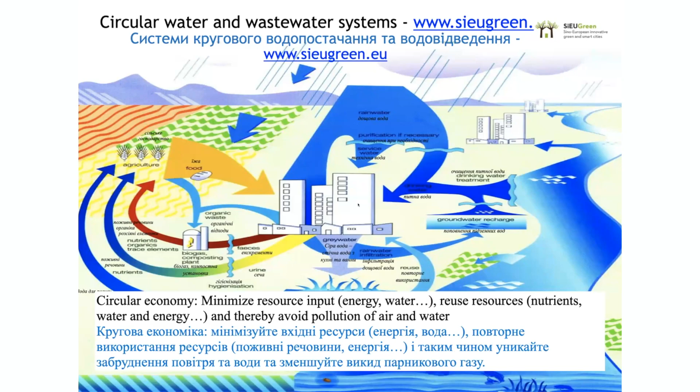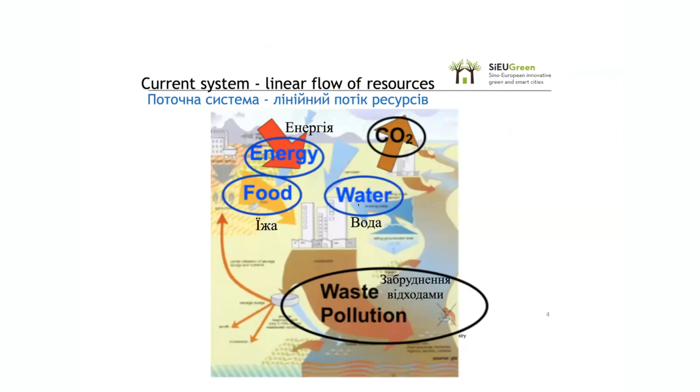And the Commission in Brussels have recognized this. They have already put out requirements to remove organic matter, to remove phosphorus. Now, the new wastewater directive will probably have stricter requirements. They want us to remove also nitrogen. They want us to remove organic micropollutants. That's important. And they hopefully also will initiate recycling, probably that we should recycle 40 or 60% of the phosphorus. But it's still a lot of focus on removal.

And removal of nitrogen, that is to turn the nitrogen back to nitrogen gas, which initially sounds good, but it costs a lot of energy. When we denitrify in our current treatment plants, we also emit, say, between 1 and 5% of nitrous oxide, which is almost 300 times more potent as a climate gas as CO2.

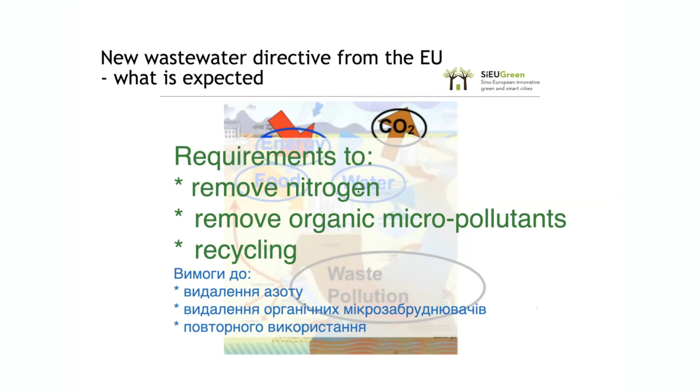We have other issues that also makes us focus more on recycling. The war in Ukraine made the fertilizer prices peak. It's going a little bit down now, but the farmers are struggling. Farmers in Norway, their economy is going down, down, down. Their input factors in terms of fertilizers, pesticides, fuel is increasing. The farmers are in despair. And also availability is an issue. China is reducing their export of fertilizer, for instance.

That's an important micronutrient, and sulfur is 60 years. Then there's natural gas. What does natural gas have to do with it? Nitrogen fertilizer uses a lot of natural gas when it's produced, so we can expect those prices to still increase. We have about 50 years left, according to Petter Jenssen, a professor from the Swedish Agricultural University.

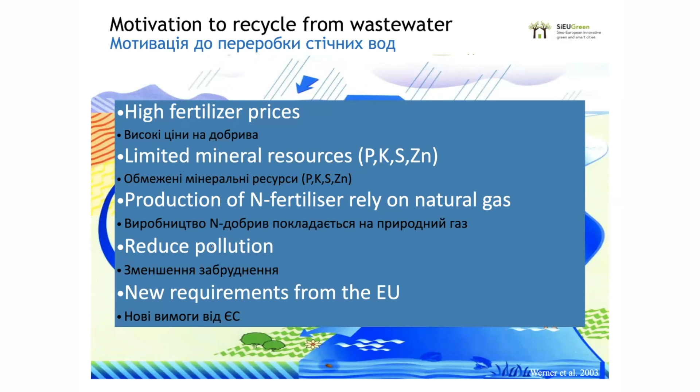And we have requirements from the EU that might also encourage recycling. What are the organic sources we can recycle? It was interesting when I read the press release from the large Norwegian fertilizer manufacturer Yara in 2019. They estimated the fertilizer value of organic resources in Europe at 2 billion euros. And what are these resources?

It's wastewater. Wastewater consists of gray water, which is all the water used for washing, showers, sinks, and so on. In addition, you have the excreta, urine and feces. This is what we will concentrate on today, that's what we have time for.

We also have organic household waste, different kinds of farm waste, and waste from the food processing industry. All this can have resources that can be turned into both bioenergy and give nutrients for agriculture. And we in Norway have a lot of waste from aquaculture.

Actually, in Norway, the discharge of organic matter from aquaculture by far exceeds the discharge from the country's population. But the government allows this to continue because we earn so much money from our aquaculture.

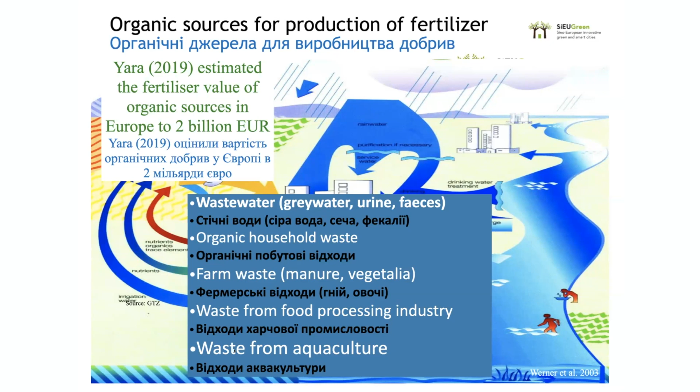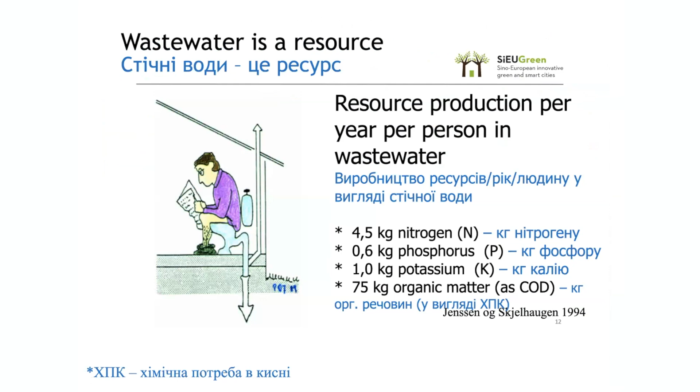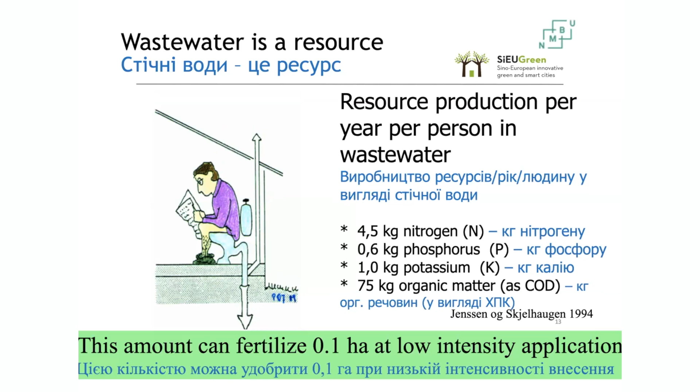Wastewater is a resource. One person emits about 4.5 kilogram nitrogen, 0.6 kilogram phosphorus, and a kilo of potassium per year—a pretty good fertilizer combination. Also, 75 kilograms of organic matter that can be turned into bioenergy and compost. In conventional agriculture terms, this amount can fertilize about 0.1 hectare at a low intensity application.

On a world scale, if we could recycle all our excreta, we could in Western Europe and North America supply about 15 to 20% of the current mineral fertilizer use. If you go to Eurasia, and Ukraine is part of that, it's around 40%. And in sub-Saharan Africa, we could substitute about all the current fertilizer use.

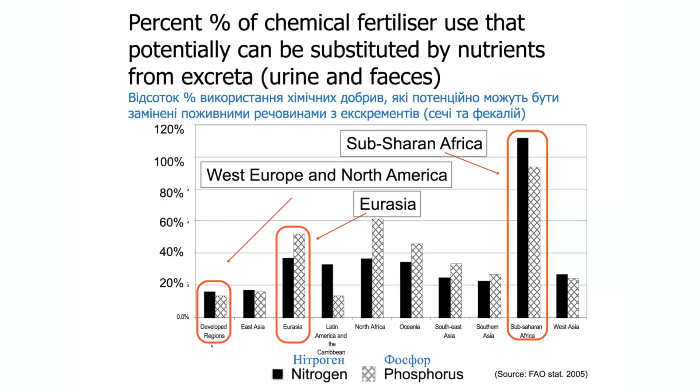This, of course, reflects that we use much more mineral fertilizer in West Europe than in sub-Saharan Africa. But conversion to regenerative agriculture will reduce the need for mineral-based fertilizers, maybe in some cases totally eliminate it. And maybe these organic fertilizers can supply much more than 15-20%, maybe everything.

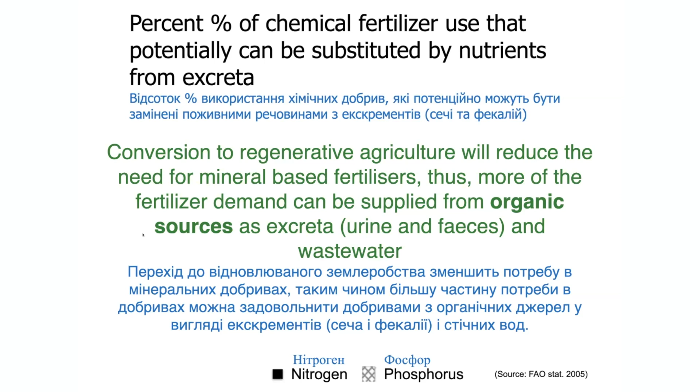We'll see. Another interesting thing is that in our excreta, urine and feces, we find 90% of the nitrogen, also around 90% of the phosphorus, and 80% of the potassium, plus more than 50% of the organic matter, and the majority of the pathogenic organisms.

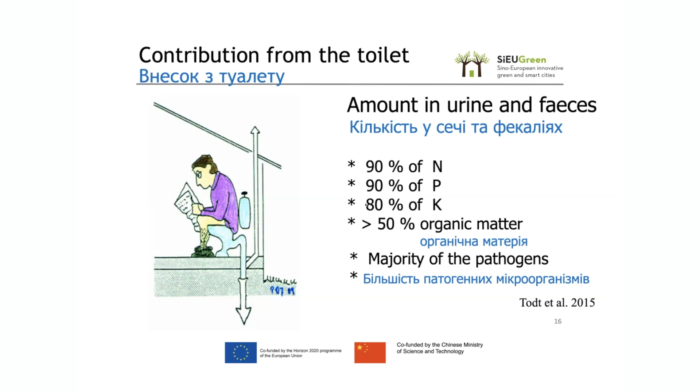If we look a little more into detail on the wastewater fractions, we can see that urine contains by far the most nutrients. Urine is the blue in this diagram. The brown or maroon is the fecal matter, which contains much less. And the gray water, all the water except what comes through the toilet, contains maybe around 10% of the nutrients—very minor compared to the excreta.

If we go to the column on the very right, we see that gray water constitutes most of the volume. Does any of you know how much we excrete per day in terms of urine and feces? Have any of you measured this? Probably not.

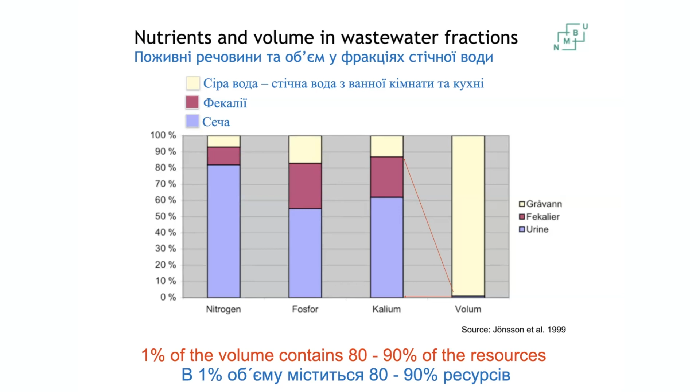But it's 1.5 liters on average, more if you drink a lot of beer. In Norway, the average water use in households is 150 liters per person, meaning 1% of the wastewater volume contains 80-90% of the resources. We need all this water to transport the waste through our piping systems, to keep the speed up and the pipes cleaned. So if we had designed these systems today, I guess we would have done it differently.

If we're going to make organic fertilizers from, for instance, wastewater, we have some requirements, and the EU has put out some requirements. You can see some references at the bottom of the page. We have to be concerned about the content of pathogens - that's not very difficult to get rid of with current practices we know. Heavy metals, that's also not a problem if we can collect clean excreta.

But of course, in a large centralized system where we have input from industries, from roads and so on, it's more of a concern than in a small decentralized system where only households are collected. Also, the content of organic micropollutants is more of a concern in large systems than in small systems where we have much better source control.

Organic micropollutants are of concern today and will probably be a requirement to remove. That's pharmaceuticals, personal care products, flame retardants, as you've heard about - PFAS, PFOS, and so on. This stuff we need to get out of the cycling, and we'll look into how.

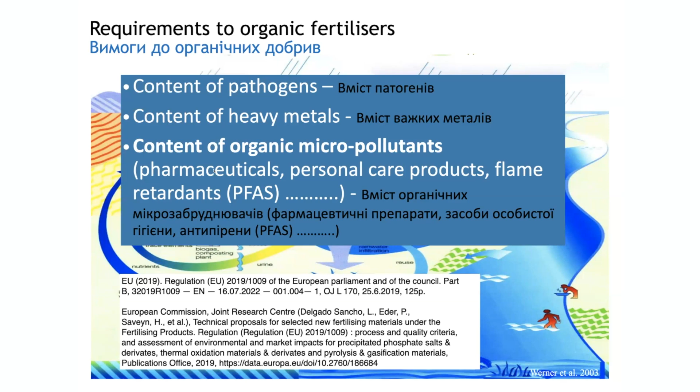First we'll start by looking into large centralized systems. What can we do with our current systems? Because they will exist for decades. Then we'll go to the decentralized systems with source separation and look at systems from household and farm scale to city scale.

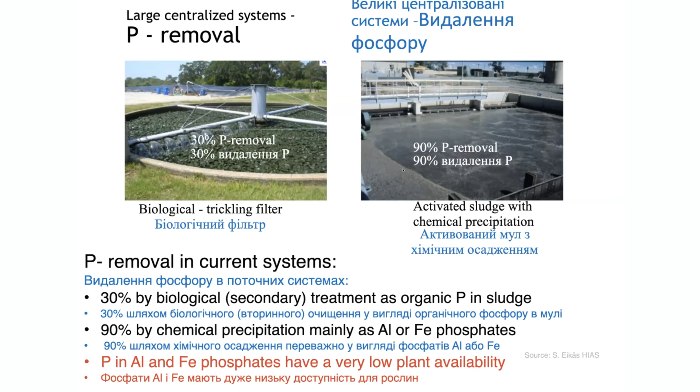As I said, we're concerned about removal today. It's very common to have biological treatment as a trickling filter, and you remove about 30% of the phosphorus in the sludge. If we go to a more advanced system, activated sludge with chemical precipitation, we can remove 90% of the phosphorus - but that's just removal. The problem with precipitating phosphorus with aluminum and iron coagulants is that the aluminum and iron phosphates have a very low plant availability.

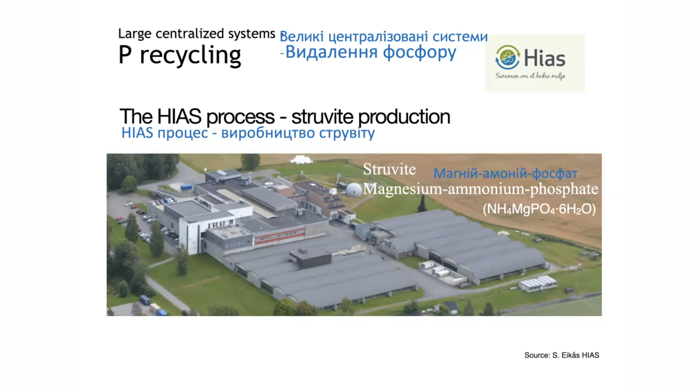So let's jump to Norway and HIAS's treatment system outside Hamar in Norway - one of the larger treatment plants in Norway, which has developed a new method for removing phosphorus. They precipitate phosphorus as struvite, which is magnesium ammonium phosphate. The HIAS process removes 90% of the phosphorus, meeting their current requirement of 90%. But they remove 50% as struvite and 50% as organic phosphorus pellets. This is new, and struvite also contains some nitrogen.

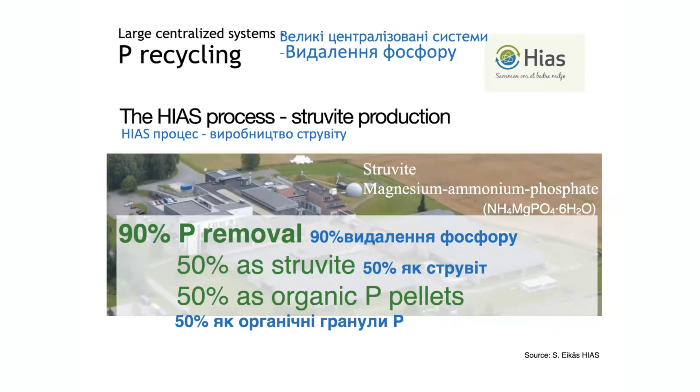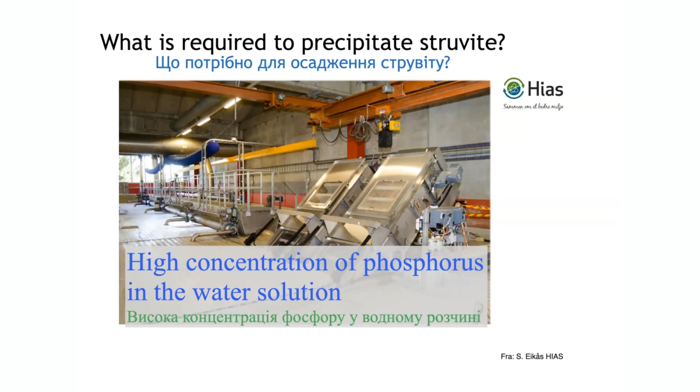Well, you need to concentrate the phosphorus. At HIAS, they use a biological process to let the bacteria super-consume phosphorus. They concentrate the phosphorus in the solution, and then they can precipitate struvite. This is a groundbreaking process - probably the world's most compact biological treatment technology. They have avoided using chemicals, reduced the footprint of the system, and not increased the energy consumption of the system.

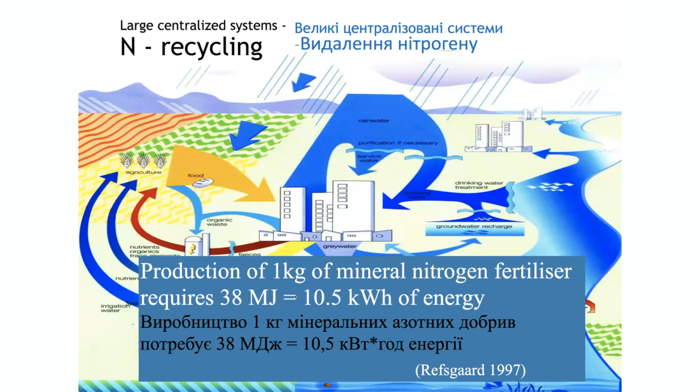Then let's move to nitrogen. I said nitrogen production requires a lot of energy - 38 megajoules to produce 1 kilogram. That's as much as in 1 liter of diesel oil. If we can return nitrogen to agriculture at a lower energy cost, we probably have a more sustainable system. So how can we return nitrogen?

In large systems, we already have ammonia stripping, but we need other things. Stripping can only take out 15%. Membranes, ion exchange - we have other systems. Algae-based systems are interesting, I'll come back to that. But a good system for recycling nitrogen in large-scale treatment plants has not yet been developed.

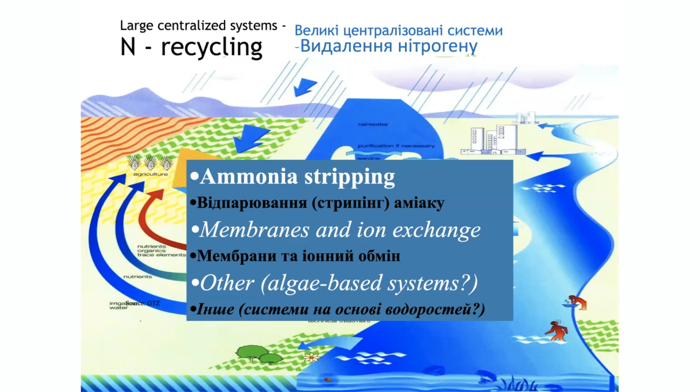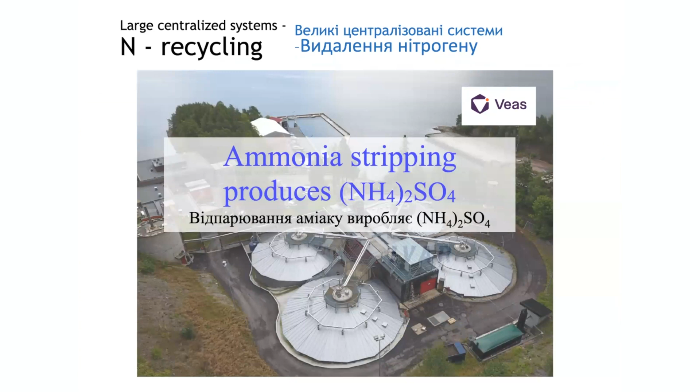Ammonia stripping, as they have in Norway's largest treatment plant, as you see a picture of here, produces ammonium sulfate, which they sell to Yara when they make fertilizer from it. But ammonia stripping also requires high concentration of ammonia, and this we only find in the reject water - the water that comes from sludge treatment. That contains only about 15% of the nitrogen input to the treatment plant. So we can only take out 15%; the rest is much harder to recycle.

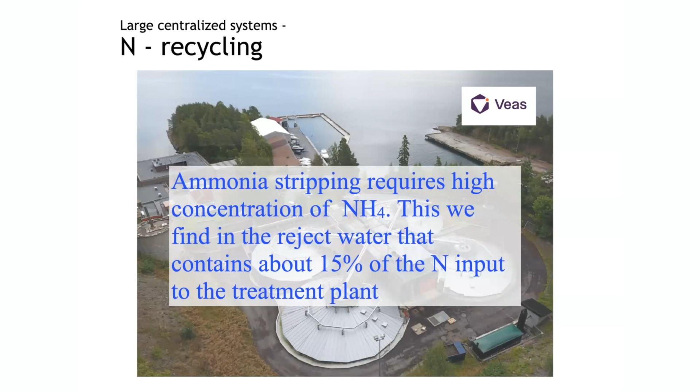Before I leave the large systems, I want to look a little at energy and biochar production. Many systems, as you see in this picture, have a biogas system. They produce biogas - that's not new. But microwave pyrolysis, which some of my colleagues are working on, is an interesting process to introduce at treatment plants, and I think it should be introduced in future plants. With microwave pyrolysis, you can take sludge that cannot be used for other purposes and turn it into biochar and energy, producing quite a bit of energy with this process.

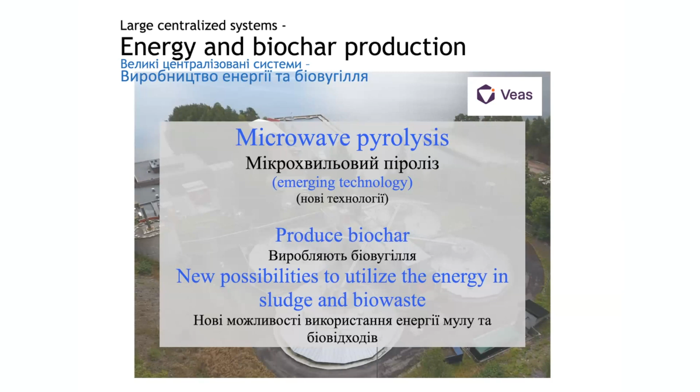Biochar is also interesting. Julia worked on biochar, but this is not Julia's work I'm showing - it was another student who used coffee grounds to make biochar. This coffee ground biochar resembled activated carbon very much, and activated carbon we use to sorb organic micropollutants.

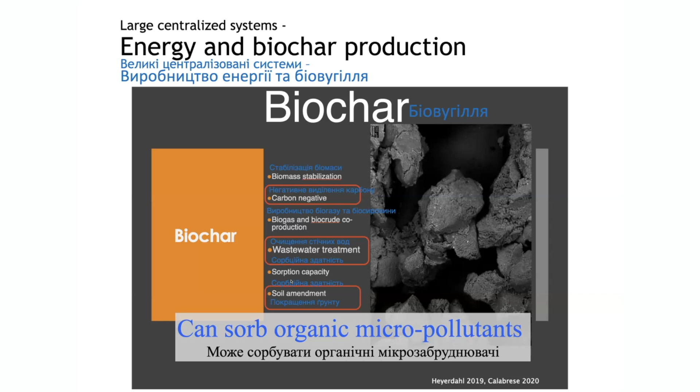They have used biochar successfully in Sweden. We want to use it also to try to remove organic micropollutants in our systems. Biochar has other positive effects too - it's carbon negative and a good soil amendment, but we have to make sure it has the right quality, and we should not cut down new forest just to make biochar, because then it may not be carbon negative. So do it with care.

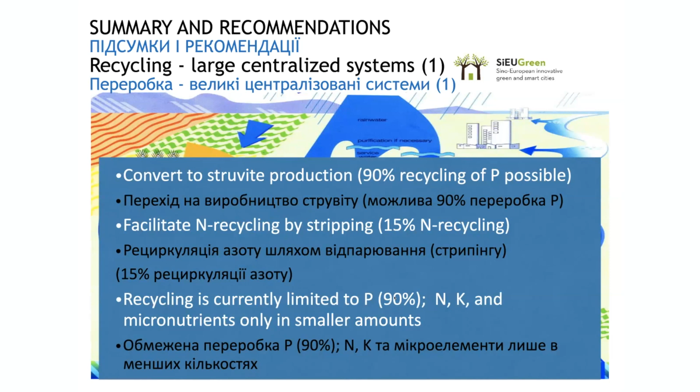So we can summarize for the large systems: we should convert to struvite production and facilitate nitrogen recycling. Recycling is currently limited to phosphorus, at 90%. If we produce struvite, it can be available for agricultural production. But the other resources and micronutrients, we can only recycle in very small amounts.

As I said, in larger systems source control is more difficult. We need to pay more attention to heavy metals and micropollutants. I think large systems should investigate possibilities to produce soil amendment products from sludge, but it's a challenging task. In this task they could consider including microwave pyrolysis to get rid of products that are not easy to recycle, that contain organic micropollutants, because microwave pyrolysis will combust most of these.

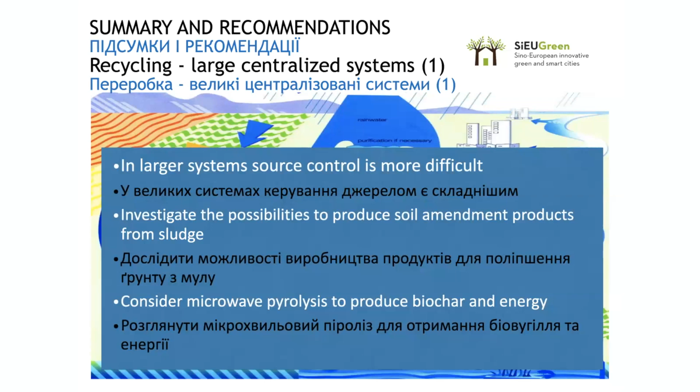So we have now looked at large-scale systems, and we'll move to decentralized systems with source separation, which you can most easily do on a household scale. You can do it on a farm scale, but also on a city scale. I won't go too much into that, but it's a very interesting approach if we really want to recycle from the large hubs of resources that cities represent.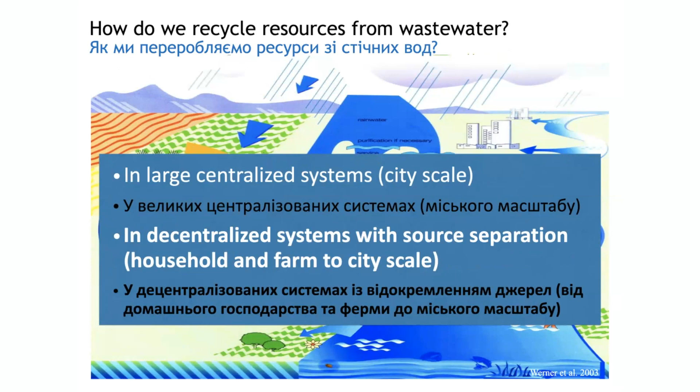I want to remind you, most of the resources are in the excreta, in the urine and the feces. So if we had designed a wastewater treatment or handling system today, I think we would have gone for source separation. We wouldn't have invented the water toilet and all these pipes that are so extremely costly - at least in Norway - to maintain, run and operate.

We would have taken the toilet waste and run it into what we call here on the diagram a nutrient and energy loop, where we produce nutrients, energy, soil amendment, and eventually food that we return to society. We could also recycle the gray water - I won't go into that in this talk, but in the SIEUGreen project we recycle gray water for irrigation, and also made drinking water from gray water.

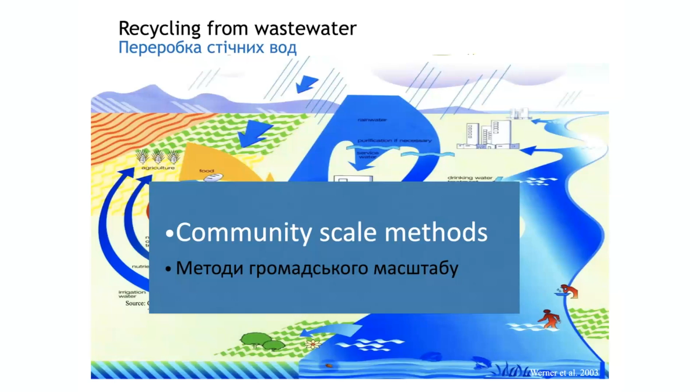I'll start with what I call community scale methods. This is a demonstration system we have at our campus in Ås, Norway. We are using vacuum toilets for 24 flats in our student housing. The toilet waste or excreta is directly funneled or pumped to an anaerobic digestion system producing biogas.

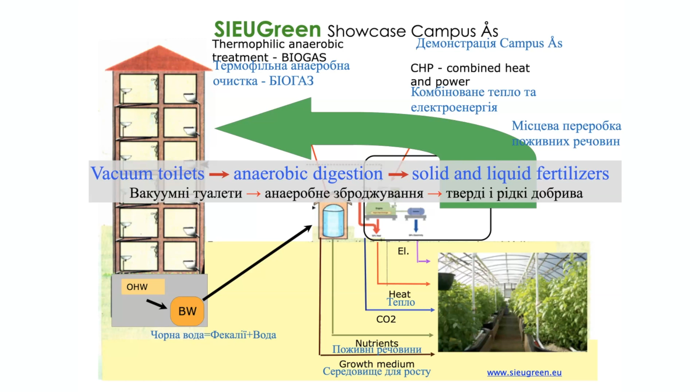We can also add organic household waste here, and what comes out is called digestate. We have solid and liquid fractions that we turn into fertilizer.

When we burn off the biogas, we co-generate electricity and heat that is transported to a nearby greenhouse. We also produce CO2 when burning the biogas, and this is funneled to the greenhouse to increase CO2 content. This is a very special greenhouse - extremely well insulated, with a special vent system so we can keep the CO2 in there and increase plant growth. Maximum growth occurs at about 1200 ppm CO2 in the air, compared to around 400 in the air we breathe.

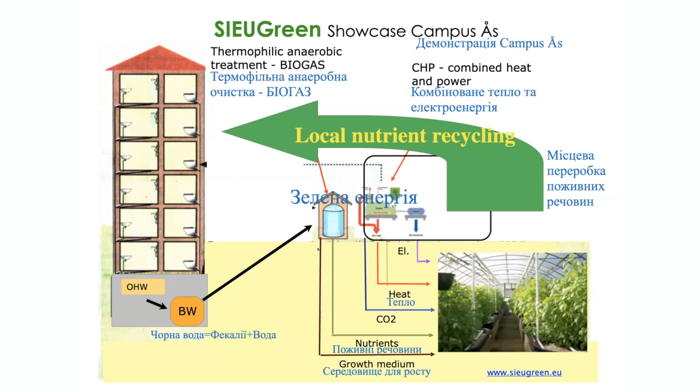From the liquid digestate we produce liquid and solid fertilizer products. From the solid digestate, what we filter off in this process, we compost that and produce compost or growth media. Struvite is difficult to produce in a large continuous process like at HIAS, but there are commercial processes now, like the Ostara process used at HIAS - that's an American process. But if you go down in scale, you can easily precipitate struvite in batch.

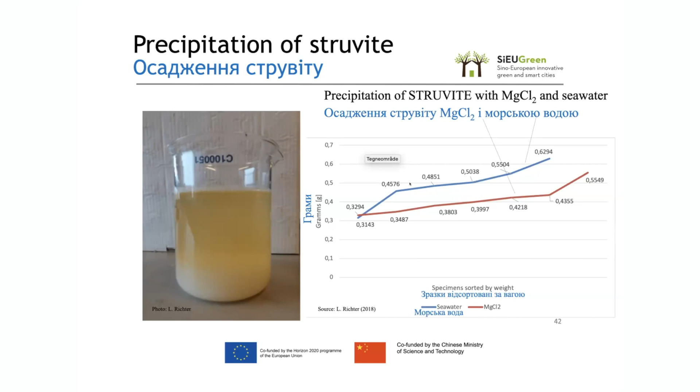You see in the picture here, we have struvite in the bottom of this beaker. We have tried to precipitate struvite with both magnesium chloride, electrocoagulation, and seawater. And you see the blue curve here - it gives more struvite with seawater than with magnesium chloride. And magnesium chloride is expensive, so if you're near the sea, seawater could be an alternative.

Algae can be used as green manure, fodder, and it can produce fat. There are many, many possibilities. So I think using algae also in large scale might be a very promising option in the future that we should look more into.

But we have talked about that we need to make high quality fertilizers. It cannot contain bacteria too much. It shouldn't contain organic micropollutants. So here, where we have excreta from student housings, we know that we are below the requirements for heavy metals.

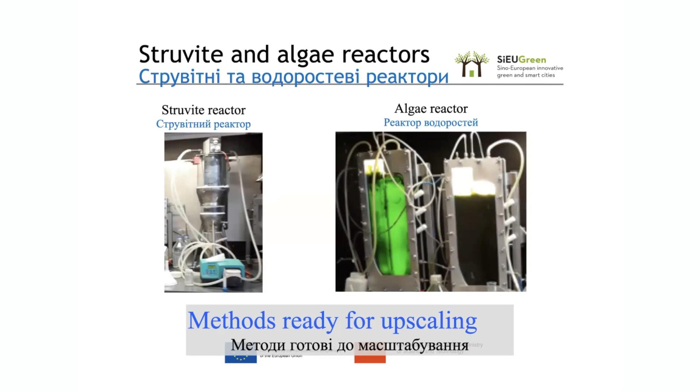So from biogas digestate, we produce liquid fertilizer, and the liquid fertilizer contains all the nutrients, macro and micro. Struvite contains mainly phosphorus, and only around 5% is nitrogen in struvite. Algae biomass also absorbs all the nutrients, macro and micro. And then we make compost.

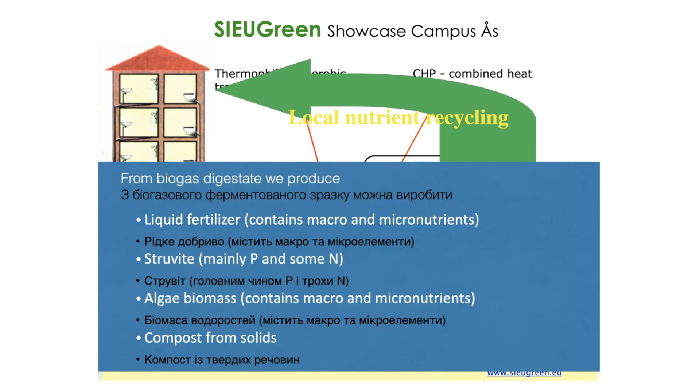So the system you see here is a decentralized, complete recycling system that can be used for one or more apartment buildings, a section of a city, a village, or a group of houses. It can also be used to sewer the whole city if you convert it to low flush toilets like vacuum toilets. But it's a technically fairly advanced system, and maybe it's expensive, but it's possible to do this decentralized with a system like this, and it's not more expensive than the conventional systems.

We have made calculations showing that for a large development outside Oslo, 10,000 people, it's actually 50% cheaper in terms of investment, and also substantially cheaper in terms of operation and maintenance. One of the reasons is that this can be built out in stages - you don't need to have the whole system in place before you can attach the first apartment. I won't go more into that, but it's extremely interesting to look at decentralized source separating systems also in cities.

Then farm scale methods. If you're a farmer and you need fertilizer, why not build a sludge drying reed bed? That's in any textbook of wastewater treatment. But instead of sludge, you can apply black water that you collect from your neighbors or from your own farm. You can also handle some of your manure in this system if you size it for it.

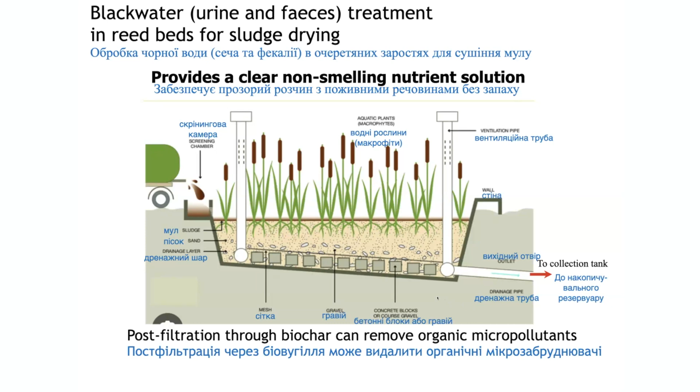And then you will have a clear, non-smelling solution coming out at the bottom of the system. And this you can apply as a liquid fertilizer in your field if that is appropriate. You can also have a post-filtration stage in a small, simple filter to remove the organic micropollutants if you want to. And how should you apply this? Well, we saw some machines yesterday.

I wanted to show this machine that a couple of colleagues developed in the 90s. It was developed to inject liquid fertilizer into the soil. And the liquid fertilizers we used were urine, processed black water, and also liquid composted manure. The reason why we wanted to inject it like this is that if we surface apply it.

You can lose 70 to 89% of the ammonia because these liquids contain nitrogen mostly in the form of ammonia. There's also a smell connected with that.

But in this system, we shoot both seeds and the liquid, in this case a fertilizing liquid, into the ground. We don't have anything that penetrates the ground. It's a ski that slides on top of the field and shoots pulses down with the liquid and the seeds. When we did this, we had yields comparable to the yields with mineral fertilizer, and this was with much less power to pull. It was saving both operation time and power on the tractor, and we could do it easily in no-till systems.

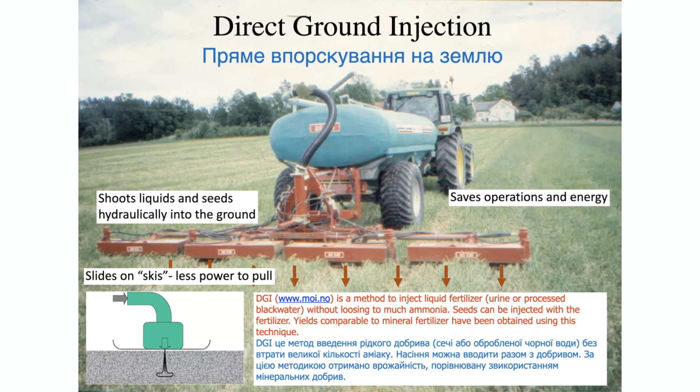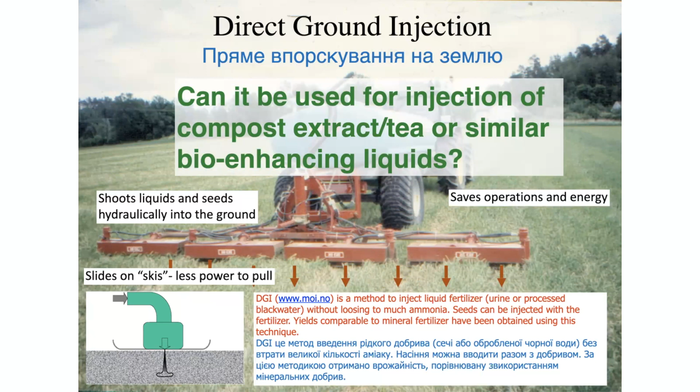So could this machine be used for injection of compost extract, compost tea, or similar bioenhancing liquids? I have one concern because I work with vacuum toilets and how the vacuum affected microorganisms like bacteria. With normal vacuum toilets, they did not die off in large amounts. Here you have hydraulic pressure - how does that affect it? We need to test that, but they're pretty hardy guys. Most of them should survive, but maybe the larger ones, if they were there, would be more affected. This needs to be seen, but anyhow, it's an interesting machine.

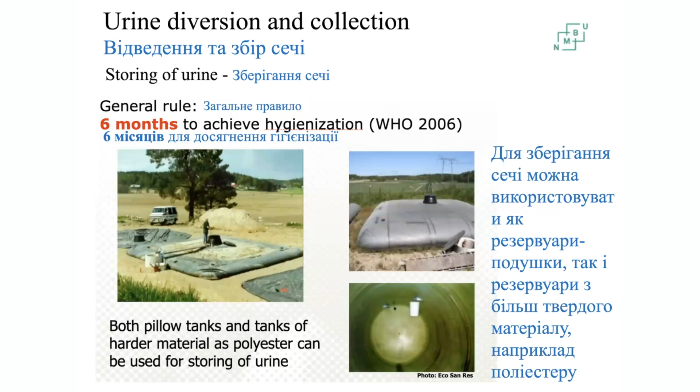And it can also be used to apply urine. These pictures are from Sweden. Urine is the simplest way to get fertilizer if you are a farmer. Collect urine, store it for 6 months - that's what the WHO, the World Health Organization, requires. And it can be stored in pillow tanks on top of the ground. That's cheap, but you need urine diverting toilets.

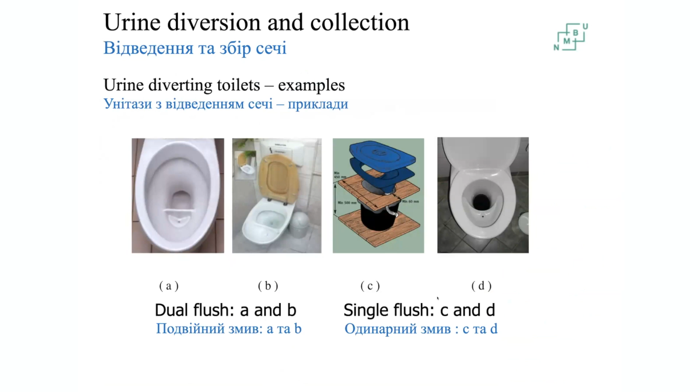So then we go to the household scale, and we move to Ukraine, Bogdan. You sent me these nice pictures. I'm really looking forward to coming down and seeing your biopots, because in the biopot you can treat your wastewater, and at the bottom you can have a clear, non-smelling nutrient solution. This is how it happens.

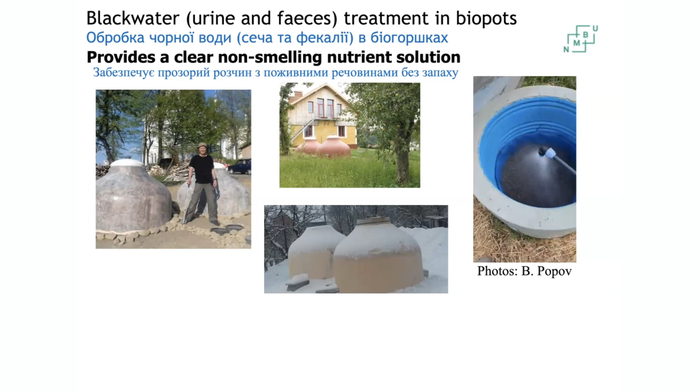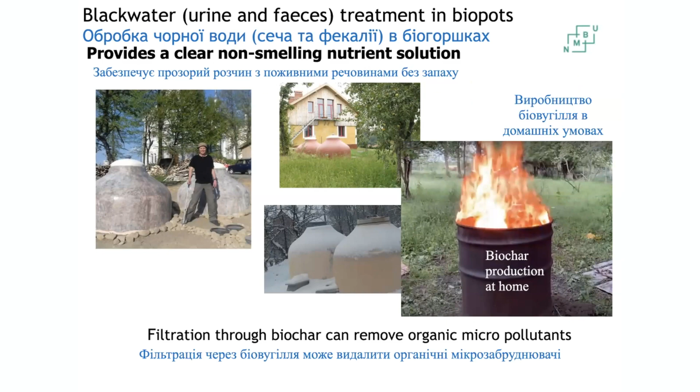You have a pump and you spray it over a filter material, and then you treat the liquid. If you filter through biochar, you can also remove organic micropollutants. So you leave a little filter after the biopot, and the biopot looks nice - some of them are decorated. The biochar you can produce at home. Bogdan is doing this - these are also Bogdan's creations.

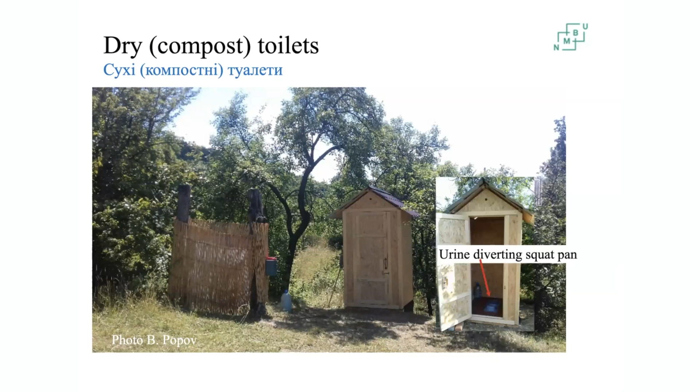It's dry or compost toilets, and especially in rural areas, this is a good way to deal with sanitation. This toilet has a urine diverting squat pan, so you can collect the urine if you want. Urine diversion reduces smell problems in such a toilet.

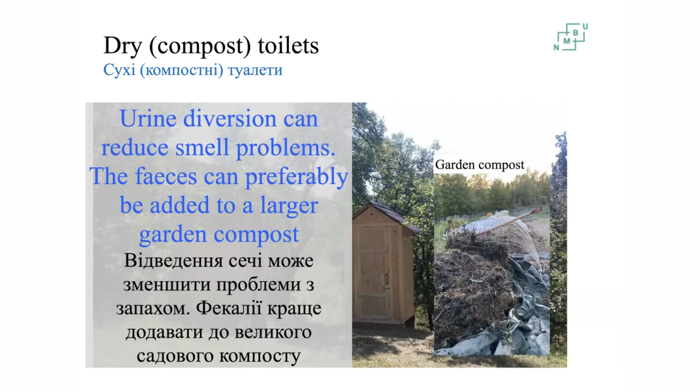And the feces you can add to the garden compost. You see the garden compost here, pretty hot - this is from our farm, my wife is smoking. But this is a way to give it a secondary composting and be sure you have destroyed all the pathogenic organisms.

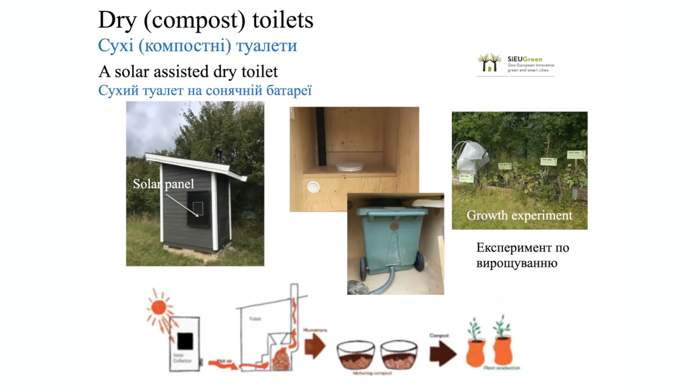In this toilet, we do not separate the urine, but the excess liquid is collected and goes together with the feces into the secondary composting. This was an urban garden in Denmark - they used the composted fecal matter and had significantly higher growth and yields than with the regular practices in this garden.

So then we'll sum up. It is possible to recycle in both large and small scale, but it's more complex and more challenging in the large scale. We need better methods for nitrogen recycling to be developed for large scale systems. I think algae production at large scale can facilitate this and should be explored, because you also recycle other nutrients. In source separated black water and urine, nitrogen and phosphorus are concentrated.

If you put in vacuum toilets or separate out the excreta in a city, you can truck this to the treatment plant where, if it produces struvite or has stripping, you can produce fertilizer. So I think applying source separation, at least in new buildings, should be a requirement. Sweden had it for a while too, as a requirement in some municipalities.

But also in existing buildings and even in cities, this will facilitate recycling. And we need to make sure we produce a high quality fertilizer, so removal of organic micropollutants is important. That can be obtained using biochar of the right quality.

And at last, but not least, and this is what I want to discuss with you guys, organic fertilizer products need to be tailored to suit the needs in regenerative agriculture. Maybe the needs for fertilizer aren't that high if you really can get the soil health and soil food web to work, ideally where you live. But what can we do with the immense amounts of resources in terms of nutrients and organic matter that our cities and our homes produce? They should be recycled into some useful products, and agriculture can be one of the recipients.